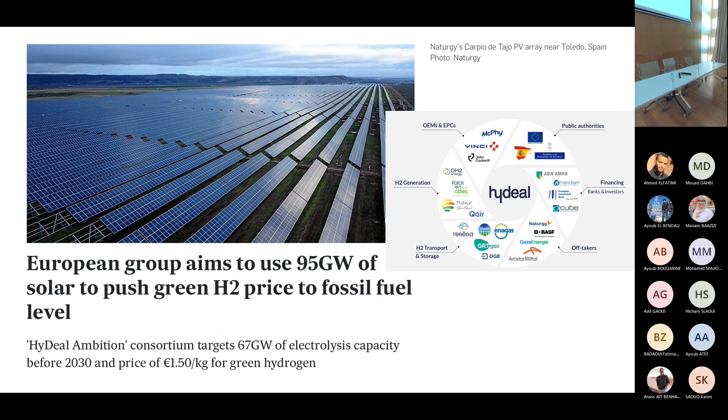If I take, for example, this HyDeal Ambition project from Spain, you can see we speak about 67 gigawatt of electrolysis capacity. It's enormous. I don't know how much is the production of Morocco, but I guess around 28 gigawatt. So it's twice the Moroccan electricity production going into hydrogen. If we look at the Swiss company H2 Energy, they signed an agreement with Plug Power of the US, also for a gigawatt scale electrolyzer, and this one is with offshore wind.

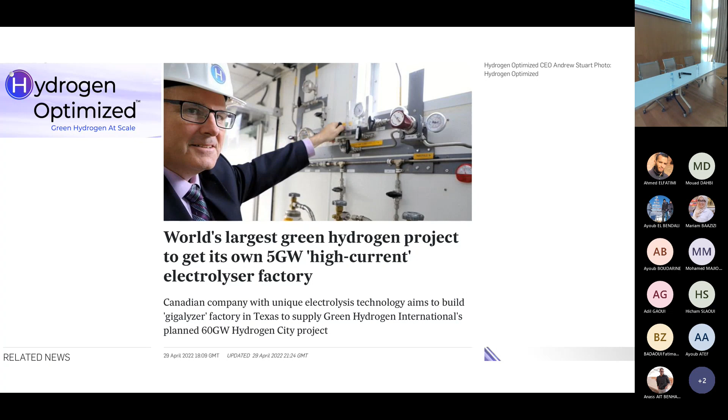If we go to Saudi Arabia, they speak about the world's first gigawatt scale hydrogen electrolyzer with ThyssenKrupp. ThyssenKrupp is known for doing chlorine electrolyzers, but we are speaking here about 500 billion. That's a lot of money. And of course, the Americans have to have the biggest, because the Americans always have the biggest. So they have the world's largest green hydrogen project with Canada for 5 gigawatt, and so on. And just 2 weeks ago, TotalEnergies of France signed an agreement with Adani of India for 5 billion investment to take 25% of Adani to do hydrogen production in India, and we are speaking of about 30 gigawatt.

So again, we are really at the big number scale, okay? So just to speak about Morocco, the only thing I could find was this announcement by Total that Total will invest in a mega project. So this one is not giga, but it's a mega project in Guelmim, which I believe is south of here.

Is that correct? Yes. So you know all about that? You know more than me about it?

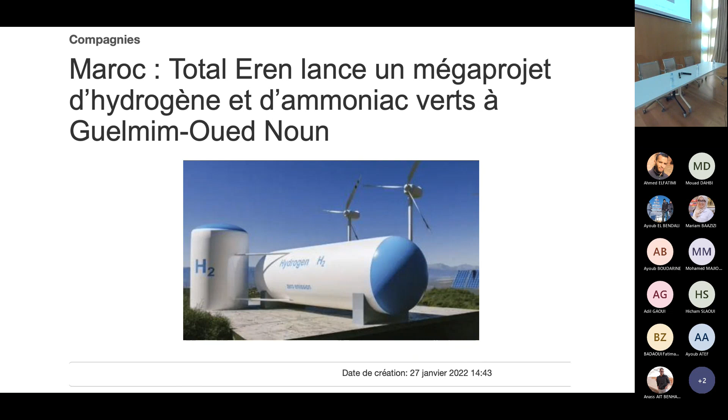Anyway, so why all those announcements? Is that just because the planet is really having a transition? Now, if we look back, the 19th century has been powered by coal and steam engines. So we all know that. The 20th century has been powered by oil and the combustion engine, and electricity was a vector of energy. And of course, in 2022, the question will be, what will be the energy of this century?

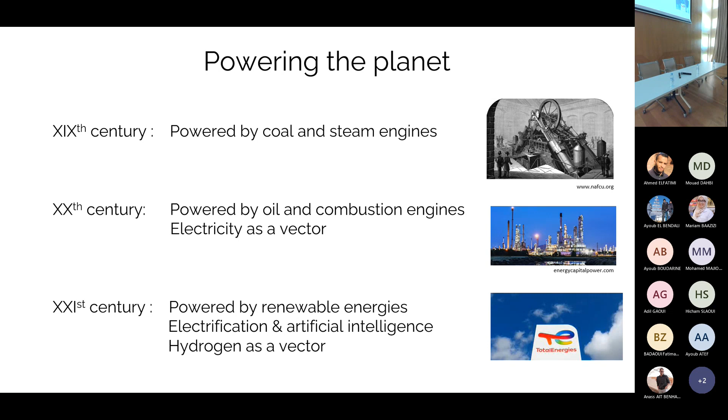And of course, if we believe in global warming and so on, we think it will be powered by renewable energies with massive electrification and massive use of artificial intelligence. And then the question is, can hydrogen be a vector of energy for this new economy? That's the key question. Now, if I take the EU roadmap, the EU is really pushing for a large-scale generation of renewable energy, and that means mainly for Northern Europe wind, for Southern Europe sun.

Then the idea, of course, is to distribute this energy across Europe for the different sectors and regions. Can we use storage as a buffer? That's a good question. And basically, what are the goals? Goal number one is to decarbonize transportation, and mainly, I guess, heavy goods transport. Decarbonize heating and power for buildings. You can now buy a water heater based on hydrogen.

And of course, decarbonize industry heat use. And in this one, green steel is really on the agenda. And I guess that Maghreb Steel in Morocco has ideas of doing... I say, I don't know that. Okay, so Maghreb Steel, I guess, has also ideas on how to decarbonize steel production.

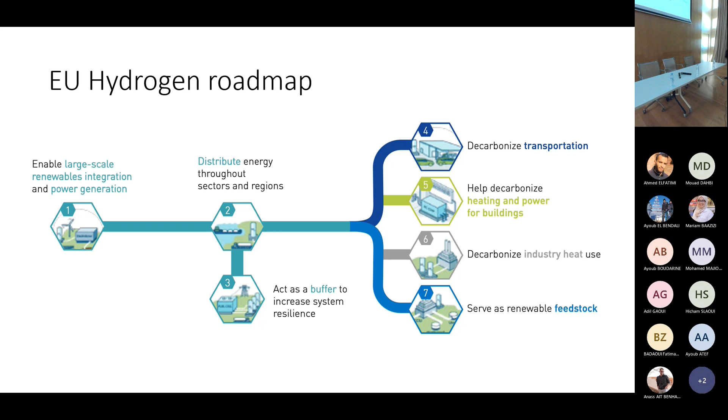And of course, at the end of the day, it will also be used as a feedstock. And that's what Power2X, the conference in Marrakesh today, is all about. Can hydrogen be used as a feedstock? So basically, this is the roadmap. And being a professor of chemistry, let's speak about chemistry and not too much about politics. And let's start with the colors of hydrogen.

So the hydrogen, as we know it today, 95% of the production is gray hydrogen. So at the beginning of the 20th century, hydrogen was produced mainly by gasification of coal, and that's what we used to call town gas. London, Paris were littered with gas lights, and this gas contained hydrogen, methane, a mixture of everything coming from coal, and that was the beginning of the 20th century.

Actually, in 1801, Philippe Le Bon in Paris, during Napoleon's time, had a house where he was producing hydrogen in his cellar to light the building. So if you go to Ile-Saint-Louis in Paris, go and visit Le Bon's house.

Anyway, when petrochemistry came, people started to stop gasification, and they started to go for steam reforming of methane, or even autothermal reforming of methane. The idea there was to react methane with water to make CO and hydrogen, so what's called syngas. And if we use the reversible water gas shift reaction, reacting carbon monoxide with water, we could produce hydrogen and CO2.

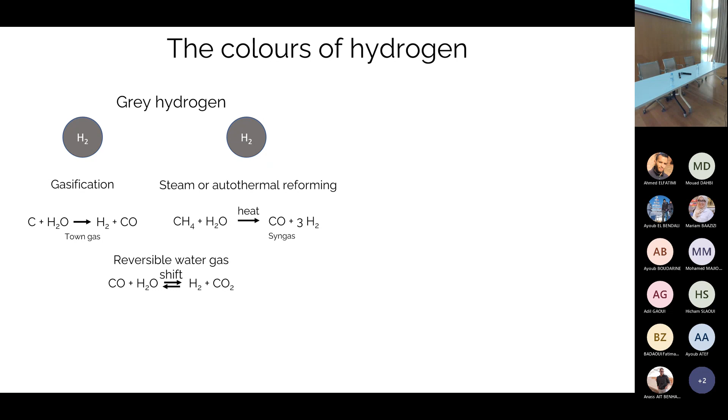And this is why this hydrogen is called grey hydrogen, because when we do steam reforming, we produce hydrogen and CO2. Now, if you can capture CO2, the hydrogen becomes blue, because it is assumed that you have no CO2 emission. So this is neutral production. What people call green hydrogen is done by electrolysis. That will be mainly the talk today, because I'm an electrochemist, where you split water into hydrogen and oxygen.

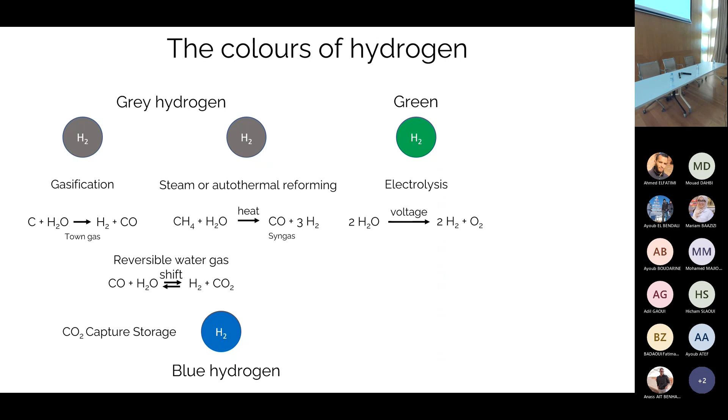And there is another type of hydrogen I want to speak about today, turquoise hydrogen made by pyrolysis. As a physical chemist, I think this topic has been understudied, and I believe that pyrolysis is a major route for the future, where basically you take CH4, you heat it up to pyrolyze it, and you end up with solid carbon that you can store or put in the ground, and hydrogen. And this one is really negative carbon capture, because out of the methane you get solid carbon that you can put in the field as biochar, or that you can simply store.

So in my laboratory, we've been playing with indirect water electrolysis. I will say a few words about redox batteries, that's for the students. And I will say a little bit about waste pyrolysis, because I am a great believer in circular economy, and I think the academic group that we are should really work hard to develop circular economy for this planet, especially for the young people. Anyway, so why is hydrogen a vector?

Because if we go for renewable electricity, of course, we cannot transport electricity over too long a distance. You can have a power line maybe up to 1,000 kilometers, but if you want to export, let's say, solar electricity to the UK, you would need a special DC power line, which will cost a fortune, and there are plans about it, but it's not yet made.

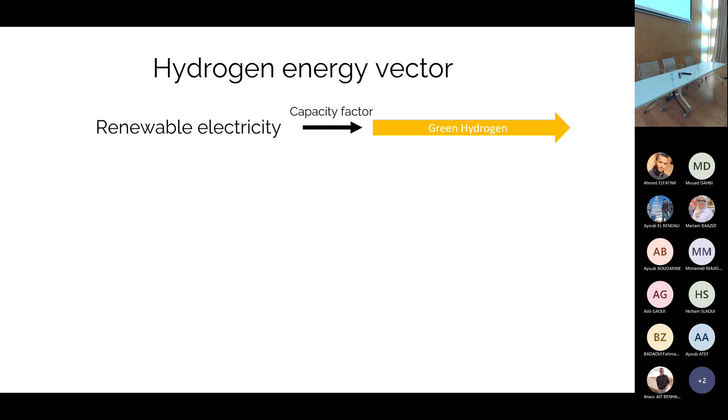So once you've done your green hydrogen, the question is, what do you do with it? Of course, you can transport it by pipeline, or you can liquefy it, or you can export it. But best, you can use it for your own use, for example, to make ammonia and fertilizer. Now, other people, when they speak about green hydrogen, that's the Swiss and the German approach, say, okay, at the moment we use methane, we are going to do steam reforming, then we do blue hydrogen. We can capture the CO2, let's say, in Germany, and in this way we have blue hydrogen.

But other people say, no, what we could do is to transport the CO2 back by boat to where the methane came from. And if you mix it with green hydrogen, you can do a methanation reaction, like the Sabatier reaction. And then you end up with green methane. Your methane suddenly becomes green because it's artificially made with hydrogen. You can transport it, and basically the green hydrogen can be used, let's say, in Europe. And now it's for you to believe if it's a good business or not.

At the moment, the methanation reaction has a yield which is not that great. So if you look, for example, from renewable electricity to green hydrogen, you lose 30 to 40%. Let's not forget that electrolysis has a yield of 60%. So if you go to what I would call the Swiss German route of methane, you lose 40% to do the green hydrogen, and then you lose another 30% to do the methanation. At the end of the day, it's a very expensive cycle. But some people are really investing money into that.

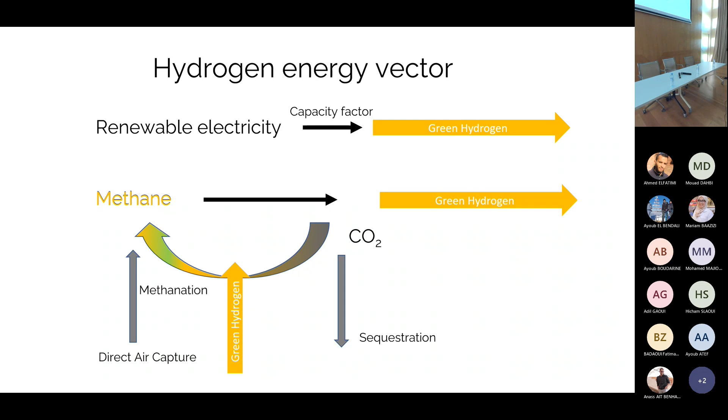I believe direct air capture has a lot of future. And since I'm an electrochemist, I would like to propose a mechanism. We all know air capture from amines, through caustic solution, alkaline solution, through different types of routes. But there is one electrochemical route that is used for air capture. Do you know an electrochemical route for CO2? Who knows one? No? So I have the pleasure to work for the company Verdox in the US, which is an MIT spin-off. And the concept here is easy.

You have one electrode with anthraquinone polymer. You have a membrane, just a separator, and another layer of polymer made with ferrocene. When you apply a voltage, you reduce the quinone to the radical anion, and for one electron, you will capture one molecule of CO2. On the other side, you oxidize your ferrocene to ferricinium. And then when you reverse the polarity, this CO2 battery gets discharged, and the CO2 is released. The advantage is that you release clean CO2 that you can use for a Fischer-Tropsch reaction if you want to, or a methanation reaction if you want to.

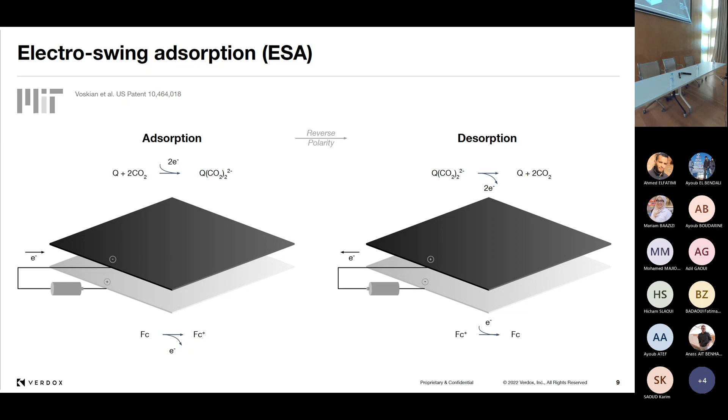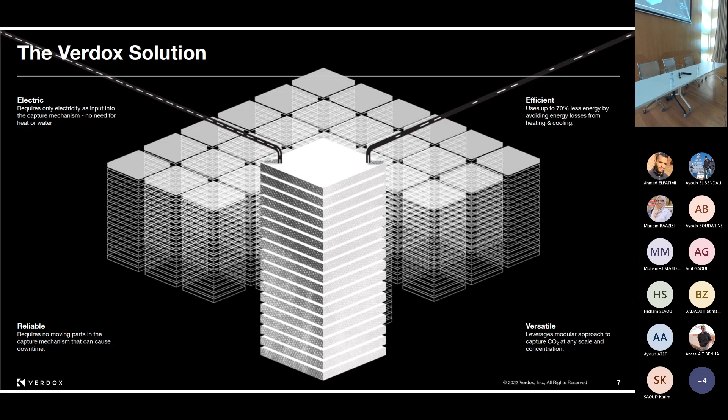And the idea of that is that because you need electricity, if you have efficient renewable energy like in Morocco, you can do direct capture also by electrochemistry, the same way that you would do green hydrogen by electrochemistry. And so I've seen prototypes of that in the US, and they have plans for kiloton, if not megaton, CO2 plants in the US. This company was financed by the Bill Gates Foundation. They got more than 80 million to develop their system, and they are quite efficient.

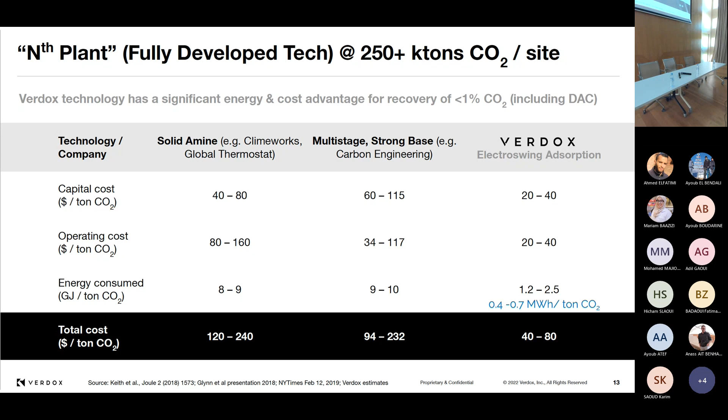And I guess that's big money, and it's quite easy to store CO2 in the ground in Morocco because you've got salt domes and you've got very nice geological structures to store CO2 in the ground. So Morocco could become a big country for CO2 storage afterwards. And so if you compare those with amine or with strong base, you see that electrochemistry for once is very competitive. And again, in Switzerland, we have a company called Climeworks, where they pump CO2 from the atmosphere to inject in Iceland under the volcanoes. But I believe an electrochemical system in Morocco would make a lot of sense.

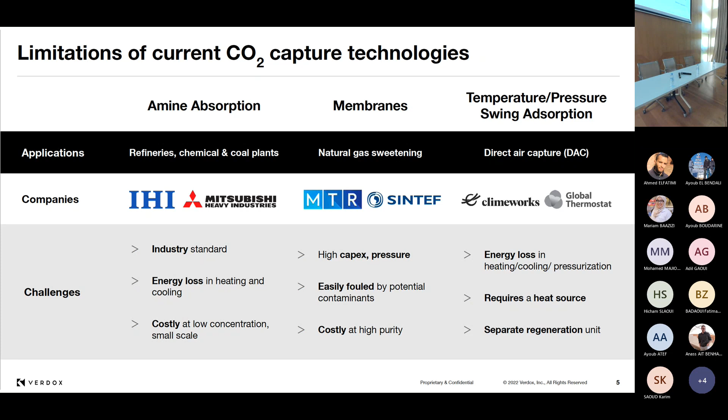Anyway, I close my CO2 capture bracket. I just wanted to make you aware that there are electrochemical ways to store CO2 in a very efficient and a very clean manner. Okay? It's not a big factory to do that. Okay, so let's go back to electrolysis.

A very old reaction. I don't want to say too much about the production or the reaction mechanism of hydrogen and oxygen. I know that Debajit has a big plan to study all the electrocatalysis aspects and the mechanistic aspects of hydrogen evolution. What I would just like to say in one slide: we should never forget it's a three-phase reaction. The metal brings the electrons, the solution brings the ions, and the bubble takes away the gas. And that's what I call ménage à trois. And like all ménage à trois, they are complicated, okay?

Because there is always one who is going to be slower than the other two, okay? So sometimes the bubble blocks, the ions cannot arrive. Sometimes the ions react, they don't arrive, and so on and so on. So basically, the complexity of gas-evolving reactions lies in the fact that you've got an electronic conductor, an ionic conductor, and a gas carrier.

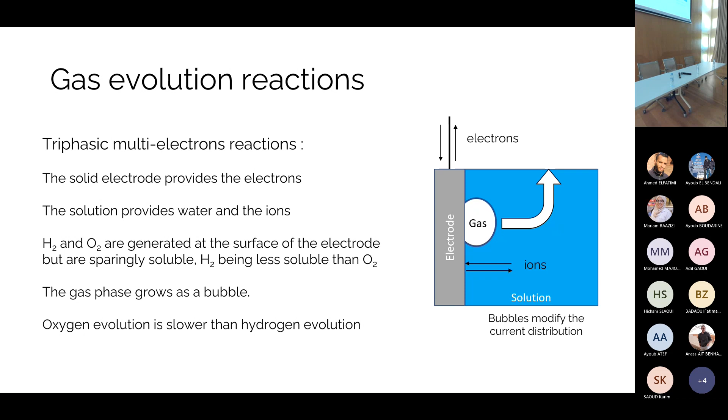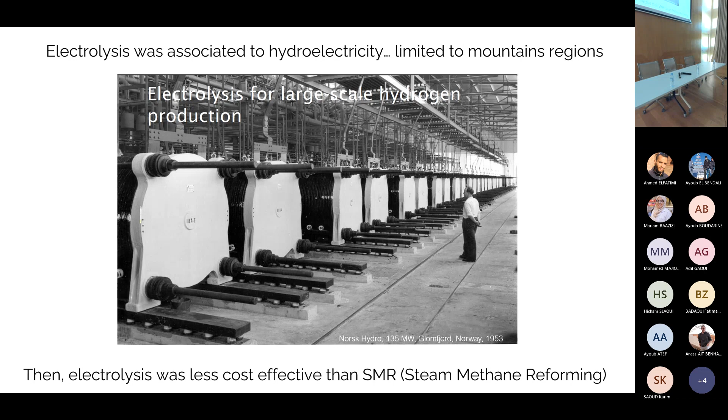Okay? But of course, afterwards, the oil era came, oil was cheap, and it was much cheaper to make hydrogen through natural gas and oil than through electricity. And therefore, electrolysis started to go down and SMR started to take over. Now, how does an alkaline electrolysis cell work?

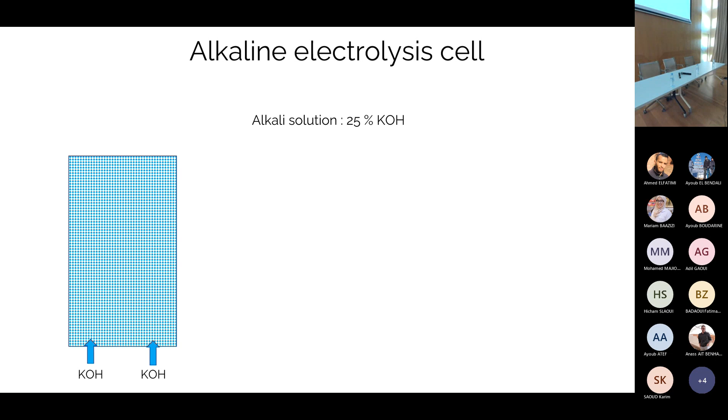Okay, at the beginning, what you need is an alkaline solution. For example, 25% KOH. Then you need to bring electrons, so you need a cathode. You need to take out the electrons, so you need an anode.

So at the cathode, of course, you are going to reduce your water to hydrogen. At the anode, you are going to oxidize the hydroxide to oxygen. That's the slow reaction. In the middle here, you need a diaphragm to avoid mixing. In the old days, people used asbestos, but of course nowadays it's Zirfon and other polymer type membranes.

You need to pass a current from the anode to the cathode. We should never forget that in an electrochemical cell, the electrons are carried by the wires and by the metal, and in solution the current is carried by ions. And because ions move by friction in a solution, there is a resistance, and that's where the system starts to get warm.

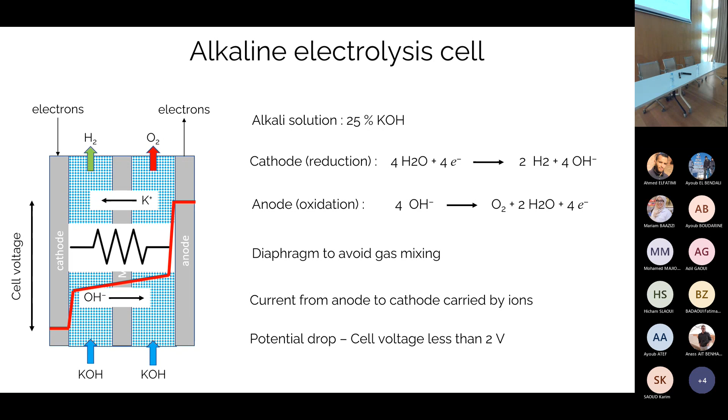And of course, in order to transfer electron to ion, you need an electrode reaction. So if we look at the distribution of potential in an alkaline electrolysis cell, we have a potential drop at the cathode where we do hydrogen. We have a potential drop in solution due to the migration of the ions. And then we have a larger potential drop at the anode where we do the oxygen. So this is textbook electrolysis for more than a century.

Okay. Now, to avoid the resistance in the membrane, people started to basically put some grid directly on the membrane in such a way to bypass the ohmic loss in solution, and that's what you call the zero gap cells.

They operate usually at 80 degrees. They have an energy loss of 40%. The cell voltage should be less than 2 volts to be useful. The current yield is very good, 98%, and the current density is not bad, 6 plus or minus 3 kiloamps, depending on the manufacturer, per meter square. So it's a big current that we are passing here.

We enter, of course, KOH in the solution. We end up with H2 and O2. Now, when you see a diagram like that, you would think that you've got liquid in between the electrodes. No, what you get is what I would call a chantilly cream type electrolyte, because it's bubbling so much that in fact you electrolyze foam. So if we were to put a camera in the electrolyzer, you would see a chantilly cake, basically, not a liquid.

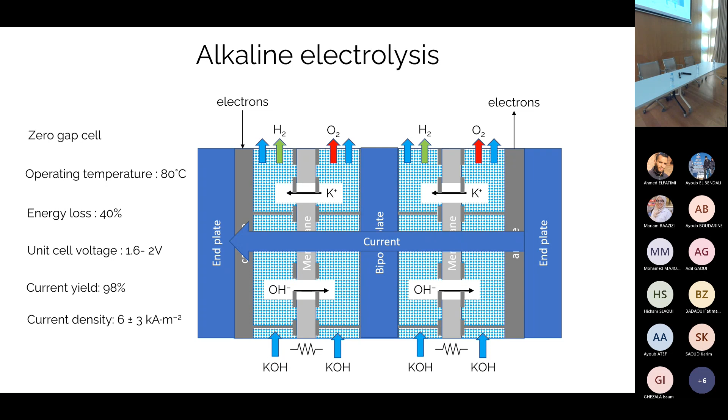But if you want to do more hydrogen, you put them in series, and this anode and the cathode in the middle end up at what's called a bipolar plate. Now, the current has to be constant through the system. So if one cell is not too performant, the other one has to wait for the slow one.

Okay, now you can stack them up to, let's say, 100 cells in series. So if you have 2 volts, 100 times 2 volts is 200 volts. That's quite good for power electronics. Up to 1 kilovolt, all the people who do power electronics can easily buy a transformer, rectifier, and so on, up to 1 kilovolt. After 1 kilovolt, power electronics start to be costly.

Okay, so that's why usually people stop at 100. Of course, when you've got 100 in series, out of 100, one could go wrong. If one goes wrong out of 100, it slows the full stack. So what people would do normally is shunt the faulty cell if there is really a problem.

But something I forgot to say about all those diagrams, we showed parallel plates. In the current distribution, if the plates are not ideally parallel, but one, let's say, is a bit tilted, all the current will go where the distance is the smallest, which means that you get a hot point. If you get a hot point, you might burn the membrane. So there is a lot of engineering in making a stack, and making the things parallel is one of them. That's why often people use titanium as a bipolar plate, because you need rigidity.

Now, all that is known for 100 years. So what we should teach students about electrolysis is the balance of plant, how to run such a system. It looks trivial by drawing. It's not trivial at all as soon as you operate it. Is the voltage fluctuating? Do you have high frequency noise on your voltage? Is your voltage signal clean? And so on and so on. Is the temperature changing too much?

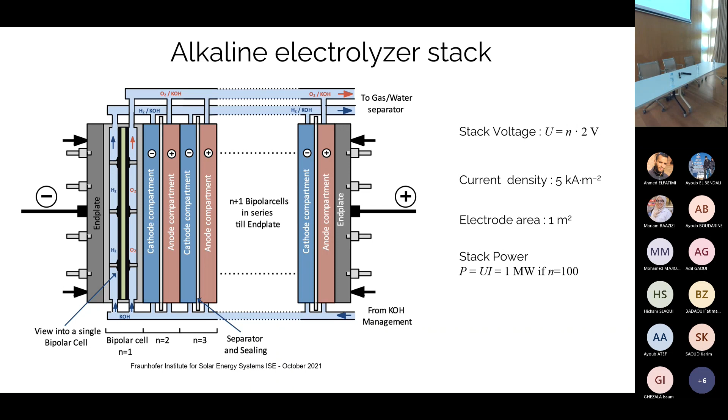Electrochemical engineering is not so much about developing a new electrolyzer, but more about how to operate them properly. If you don't operate them properly, they degrade, like any object we have. If we don't take care of our car, it degrades even faster. We all know that. Electrolyzer is the same, and those things cost so much money. They are built for 30 years. So if you want your electrolyzer to last 30 years, you better be nice to it and look after it carefully.

If we look at the balance of plant of an alkaline electrolyzer, the power electronics, transformer, rectifier, nowadays you buy from many companies. The electrolyzer, you've got also many suppliers. Oxygen is usually released to the atmosphere because people make so much oxygen they don't know what to do with it, so they just give it to the little birds.

Then the lye tank - you have to make sure your KOH is pure, that you don't have any CO2 entering into it, because if you do, you get carbonate. If you have carbonate, you block the pipes and so on. So you have to be careful. You have to scrub your hydrogen to make sure there's no oxygen leaking into it, because you don't want an explosion. So you need to scrub. You need then to compress, to deoxidize, remove the oxygen, dry it, and then store it.

As you can see, in normal operation, the 40 kilowatt hour per kilo becomes more like 50 and over kilowatt hour per kilo, because we have a balance of plant. So an alkaline electrolyzer is what I would call an electrolyzer for chemists, because it's really a chemical factory.

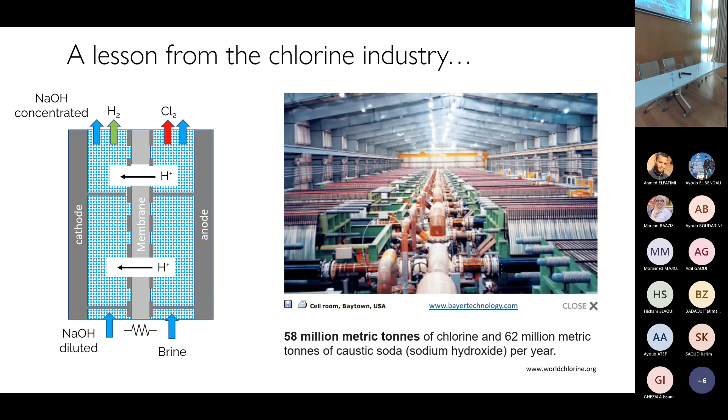Companies like thyssenkrupp in Germany know how to operate those 100 megawatt cells. As you can see, it's quite big. And if you have a pacemaker, if I were you, I would not work in such a factory, because the magnetic fields are so strong that you'd go.

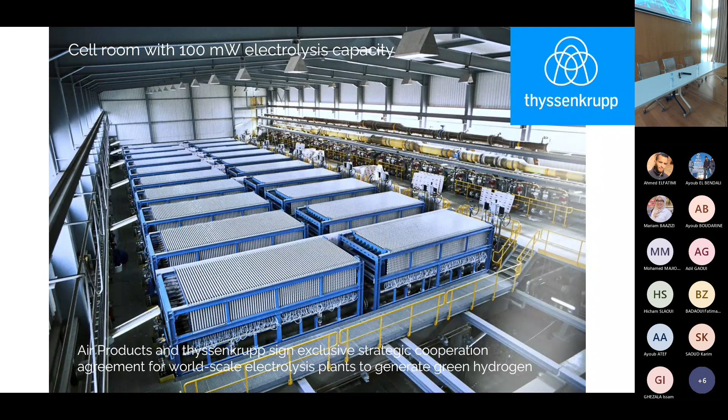Because when you do oxygen, you oxidize and you destroy your anode. Therefore, the anode is always the weak point of the electrolyzer.

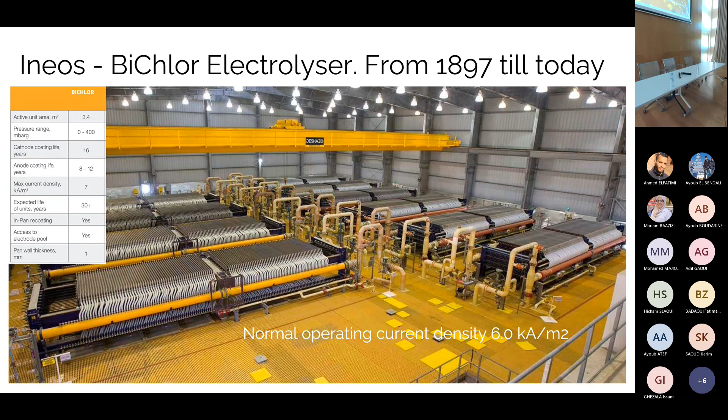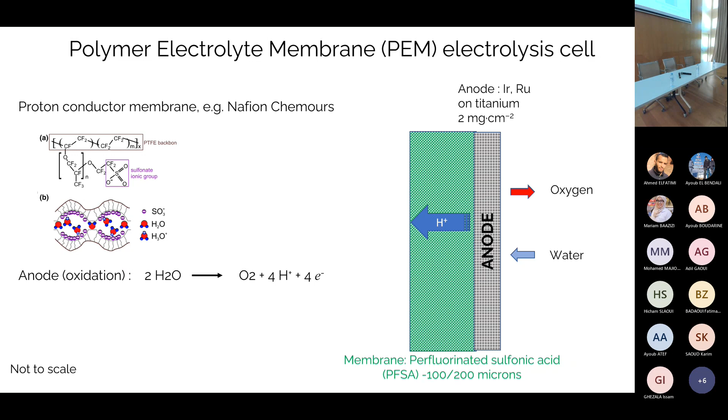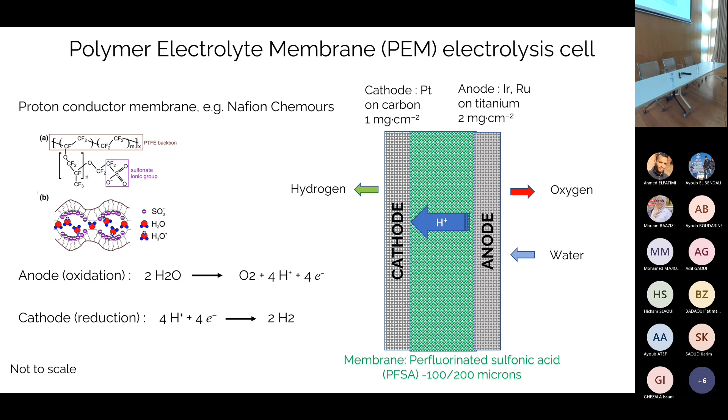Now, since the discovery of perfluorosulfonic acid, there is another type of electrolyzer on the market, which we call the Polymer Electrolyte or PEM electrolysis cell, based on a proton conductor. Again, on the right you put an anode - in this case simply a titanium felt with some catalytic particles on it. The cathode, again, will be a graphite felt with other particles, platinum on it. The proton will now be the only ion conducting the current. You feed the anode with water, remove the oxygen, and get the hydrogen on the left.

Again, we are going to put those afterwards in series. So platinum on carbon on the left, iridium or ruthenium on titanium on the right. Of course, nowadays the production of iridium is a problem, because most iridium comes from Russia and South Africa. So that could be a source of problem.

But anyway, if that was the only problem of the war in Ukraine, that would be fine. But anyway, we have bigger problems than that. Anyway, so what else to say here?

Of course, you need afterwards to structure your electrode to have a flow field where you bring the water and remove the gases. That's fine. The protons, as we said, go across the membrane. The gases go on each side.

And here you put a little layer of recombination just to reoxidize any hydrogen that would venture through the PEM membrane, so it doesn't cause any explosion.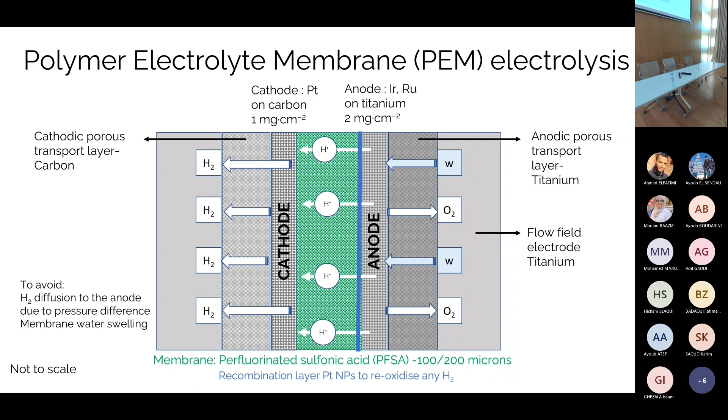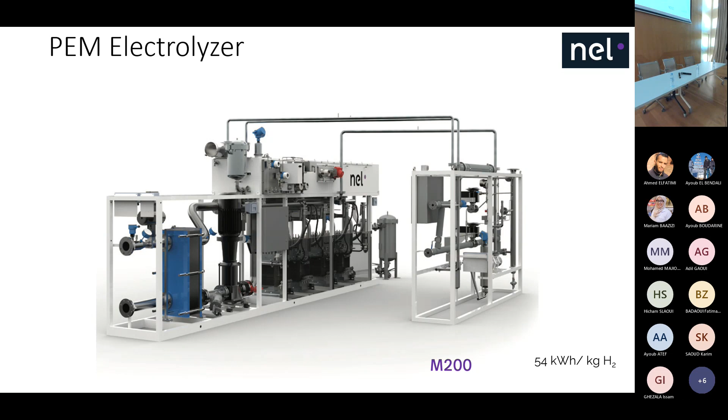Now, again, you stack them. And the beauty of PEM electrolysis is that basically you have zero balance of plant because it's a solid state device. So that's what I would call an electrolyzer for physicists. If alkaline electrolysis was electrolyzer for chemists, this one is electrolyzer for physicists, because there's basically no chemistry behind it. The only thing you need to do is separate the hydrogen and the water, dry it, and store it. So the balance of plant is much easier. Now if you look at a PEM electrolyzer, it's very compact. So to conclude, after one century of electrolysis, we have two good technologies to do electrolysis.

So the question is, are we ready to do Giga projects? All those Giga projects which are announced, can they be made? But to do a Giga electrolyzer, you need Giga production of electrolyzers. You don't have any at the moment. There are factories called Giga factories to build electrolyzers, and they're being built, but that will take 2 or 3 years before they arrive.

Now the key question is, if I take a country like Morocco, where would you put your green hydrogen production? Where would you put it? Next to the coast, of course, because the raw material is water. Now, deionized water is not very expensive, so deionizing water is cheap compared to the energy required for electrolysis. Of course, you have to worry about heat evacuation. Being by the coast is quite nice because you can use seawater for cooling your plant.

The advantage is that if you do it with your own renewable energy, wind or solar, you don't really need to care about a transmission line because you just produce your electricity locally. Therefore you know the price of electricity, because it's the price of your capex for the renewable energy and the capacity factor of your system. Whereas if you do that in Europe, it depends on the price of electricity from the grid, and at the moment this price is going up and down like crazy. It's impossible to make a business plan to produce hydrogen in Europe. Anyway, and of course you have to store it.

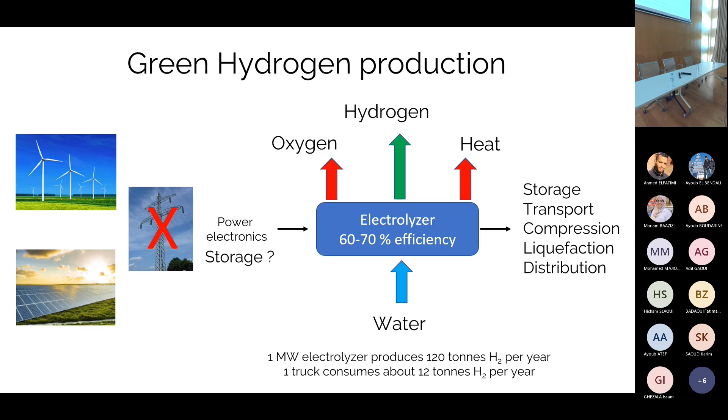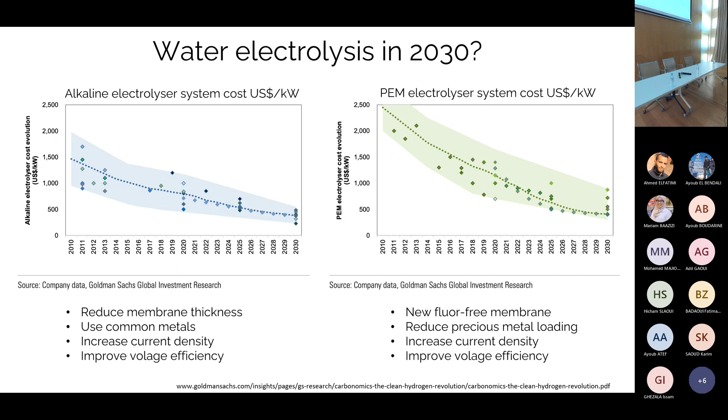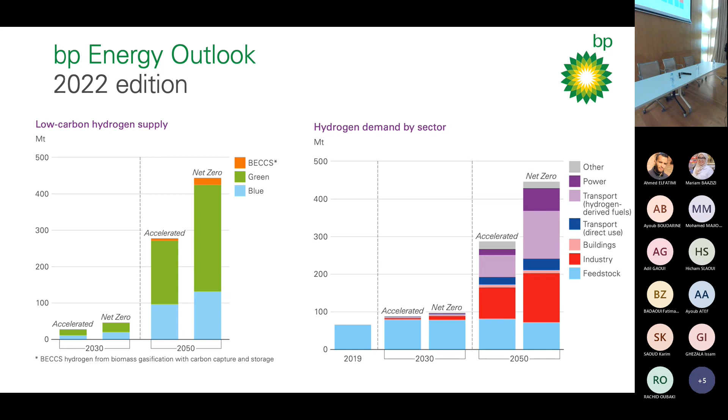So if I look at hydrogen with the eyes of a Swiss: in Switzerland, we have no electricity. If you take any newspaper at the moment about Switzerland, they say we will have a penury of electricity next winter. Buy candles, okay? Because we will be short of electricity. The Germans will be short of electricity. The French will be short of electricity. And since we buy our electricity from the French and the Germans, the chance that we will be short too is quite big. So if we have no electricity, even for cooking, we're not going to do hydrogen.

So in a country like Switzerland, where can we get our hydrogen from? Before the war, we thought that the Russians would sell us some blue hydrogen, because Gazprom had the idea of doing pyrolysis in Russia, mixing the hydrogen with the natural gas and exporting to Europe. I think this route we can now forget, at least for a while. Of course, in the North Sea, there are many people who have plans to do electrolysis directly using offshore wind energy. And of course, we have the route from the south.

Switzerland has no renewable energy as such. We have very little sun and no wind. But the north of Europe is a big wind farm, and the south of Europe is a big sun farm. When I say south of Europe, it's including North Africa. What is quite nice is that when it's windy in the north in winter, the sun is less in Africa, but in summertime it's the opposite. North Africa produces a lot, and therefore the two are totally out of phase, which is quite nice. So I guess Europe will import hydrogen, and countries like Morocco and Tunisia have a lot to offer. I guess you don't disagree with that, no?

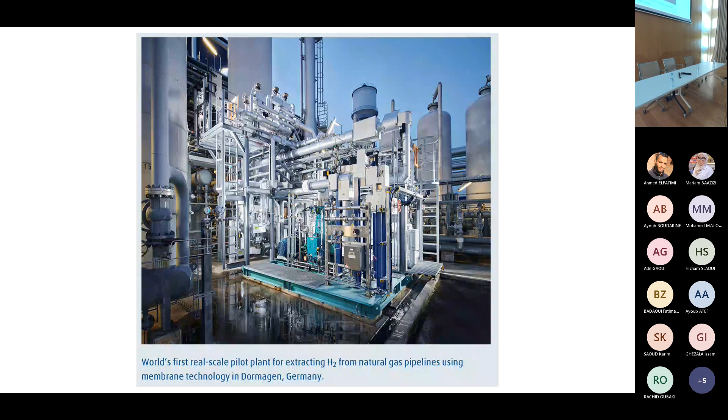Now, if I look at mixing hydrogen and methane in the same pipeline, it depends on the quality of the steel of the pipeline. In Switzerland, we can mix up to 6% hydrogen in methane. In some countries, where the pipes are a bit newer, up to 30%. And Linde, for example, has already made a demonstrator where you can separate hydrogen from methane when the mixture arrives. So if you produce hydrogen in Morocco, you can mix it with methane all the way through Gibraltar, and when it arrives in Switzerland, separate the methane from the hydrogen. So that is not a problem.

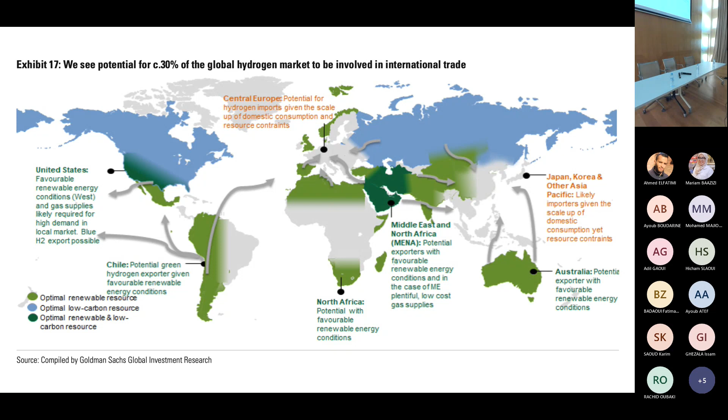Now, if I look at the EU plans for hydrogen refueling stations for trucks, they speak about one station every 150 kilometers. In urban regions, they want the system to deliver trucks at 350 bar and even cars at 700 bar. So there is at the moment a real political will in Europe to install a lot of service stations for hydrogen.

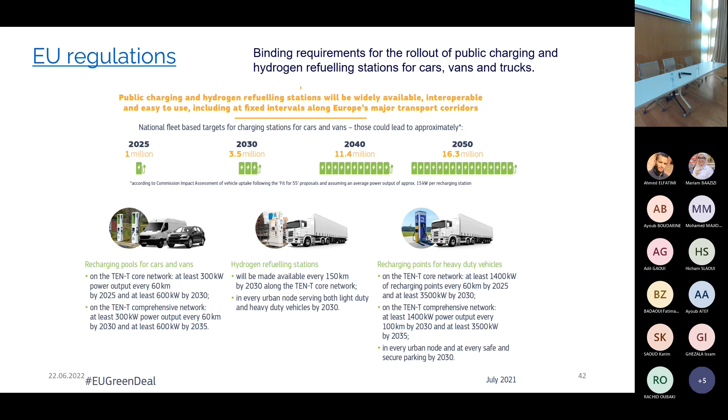So it's for the scientists to do the job. In Europe, there are two ways to do a hydrogen station. Either you do like the Swiss: they produce hydrogen, for example, at a dam in the central part, and transport the hydrogen by truck to the service station where it is stored and delivered. The French do the opposite route.

They transport electricity to the service station. They electrolyze directly at the service station. They store and they distribute. So that's the two business models. It depends if you have a good grid or a bad grid, and it depends if you have to pay a tax for the electricity or not.

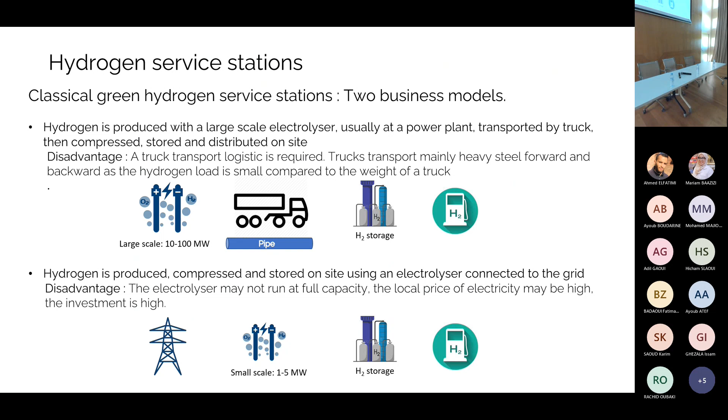Now I have had the pleasure for the last 5 years to be a scientific advisor of this company, GreenGT. And this year we were in Le Mans, and we set a record at 290 km per hour on the ligne droite des Hunaudières. And just to show this photo to say that hydrogen technology for cars is there. It's quite reliable.

We were expecting to do 300 km per hour, but the road was a bit wet and the air was humid. And in a fuel cell, you need oxygen from the air, but if there is humidity, you put in less oxygen. And as we had seen before, oxygen is the slow one. So if you don't put enough oxygen in the car, it doesn't go as fast as it should.

So next year, Le Mans 300 km, I pledge a beer to anybody in the room who's ready to take it, or beer or whatever you want, orange juice.

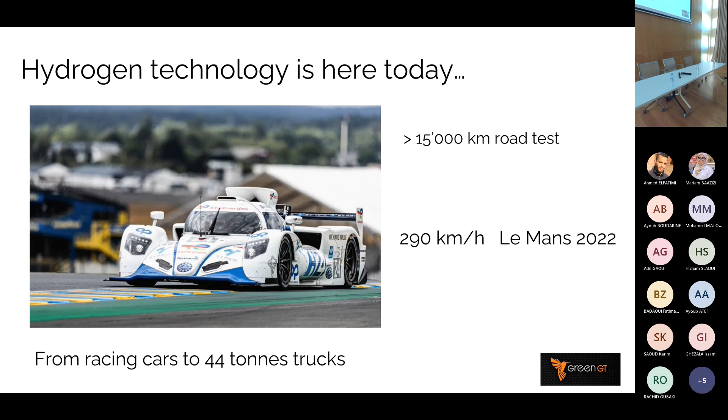Anyway, just to show here, it's written very small, but the car has 2 electric motors, so the wheels can spin at different speeds. But here we have 4 fuel cells, but with 1 balance of plant, and that's really the idea there. So 4 times 80, with 1 supply of hydrogen and 1 supply of oxygen for the 4 systems.

We like to say that our fuel cells are the Rolex of fuel cells because they are made by hand. They are really a nice piece of engineering. Those in the car have never been changed, and they work like on the first day. So again, you look well after your equipment as well.

And just maybe, the battery is 300 kilowatts with 3 kilowatt hours. So we charge and discharge the battery in less than 10 seconds because the battery is just there for braking and for accelerating. Because a racing driver is a bit binary, full throttle on or full brake on, and that's what the system is about.

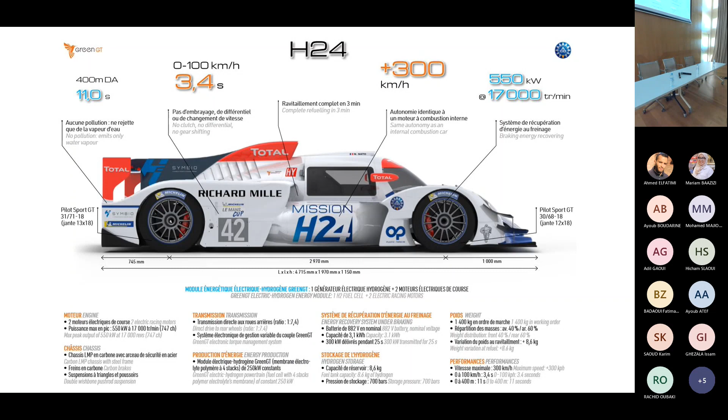Of course, we don't do that to make racing cars, we do that to make real trucks. So all the technology that we develop for the racing car, you should see the racing car as a fun, let's say, test bench to test your fuel cell, because there is a lot of vibration, a lot of constraint in a racing car, so it's a very good test bench.

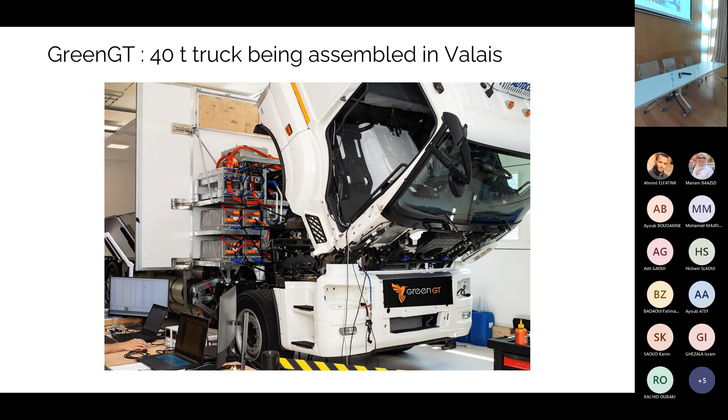And here, this truck is using two fuel cells, but with independent balance of plants for resilience. So it's twice 80 kilowatts, but totally independent. So one can work, the other one can be switched off, and so on. Here, the battery is much bigger because with a system like this one, especially when you start the truck uphill, you need a lot of power for starting. So you need a much bigger battery.

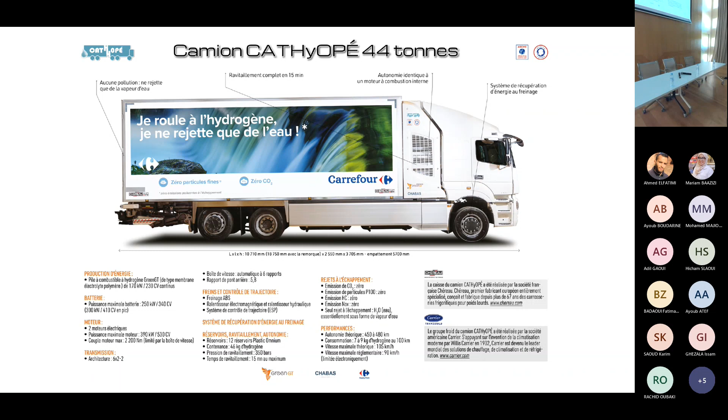If you don't mind, I would like to switch to a bit of physical chemistry because some people here in the room are working on vanadium. Who's working on vanadium? So just for you, okay? So the others can sleep, it's just for you.

I used to have a demonstrator in my lab where we had a redox flow battery, 200 kilowatt, 400 kilowatt hour, vanadium. There we had developed some power electronics to do what in 2014 was a fast charge, 80 kilowatt; now it's a normal charge.

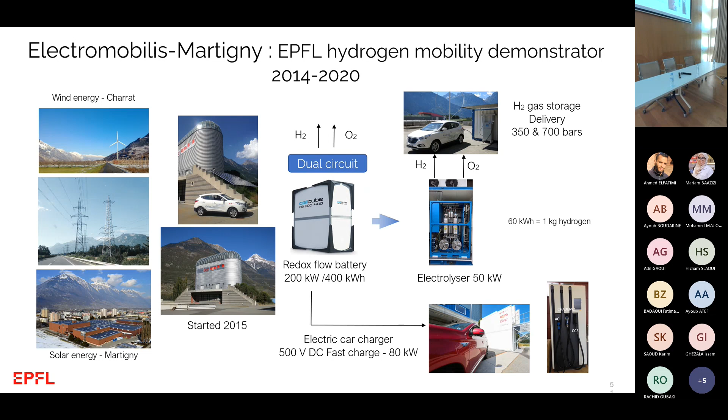And then we were driving an electrolyzer, alkaline electrolyzer, but we developed this technology of dual circuit here to do hydrogen directly from a redox flow battery. That's what I would like to present now to you.

And I remind you, what is the beauty of a redox flow battery? The power is the size of the electrodes, and the energy is the size of the tank. So you can have big power by having a lot of electrodes and small energy if you have small tanks, or small power if you have small electrodes and big tanks, you have big energy.

Whereas if you have, for example, the lithium iron phosphate battery, because you store within the thickness of the layer, power and energy are totally related. You can try to make the film a bit thicker to make it more energy, but there is a limit to that.

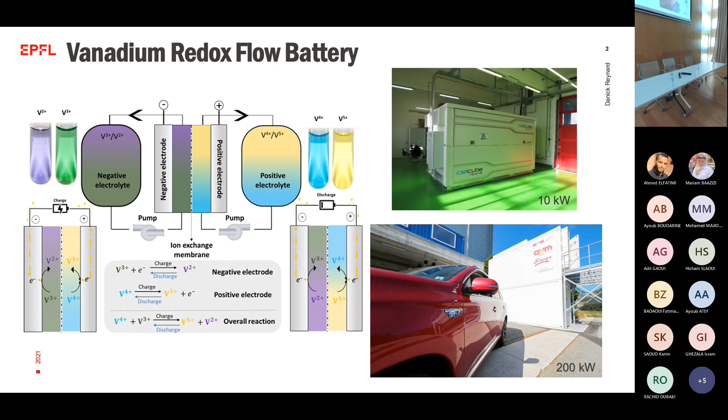Now, what we've done in my lab is to add to the positive side manganese salt. So I understand that in Morocco you have a lot of vanadium from OCP, you have a lot of manganese from the ground. So here you can do vanadium 2,3 on the left and manganese 2,3 on the right.

The idea is I will show you that if we pass the vanadium 2 solution on a catalyst, we will do hydrogen. If we pass the manganese solution on the right on a catalyst, we will do oxygen. And more important, we'll produce protons to equilibrate the pH of the full system. Okay. So are you ready for a little bit of electrochemistry?

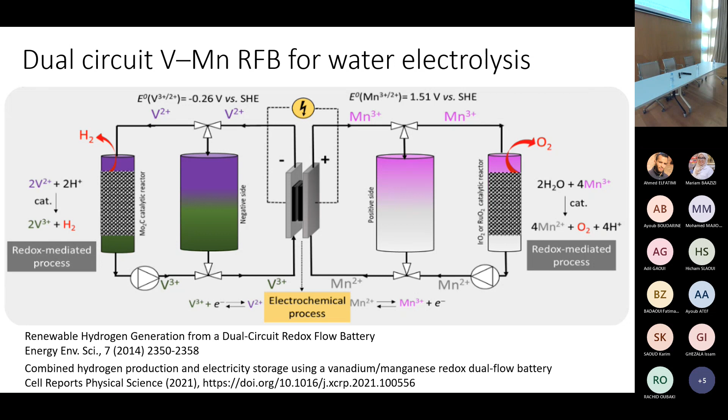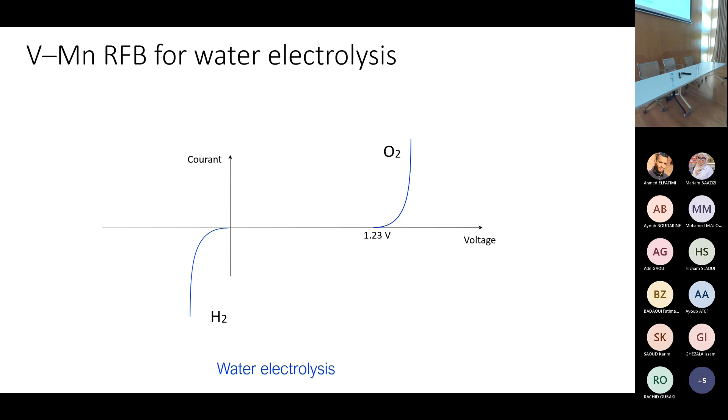So this is water electrolysis. On the left, if I go negative, I do hydrogen. On the right, if I go positive, I do oxygen. Thermodynamic potential 1.23 volt, but because of the kinetics, it's spread.

Now, if I use vanadium 2, we see that vanadium 2 is more negative than the proton. So vanadium 2 should be able to reduce the proton. It's like when you put a piece of zinc in an acid, you form hydrogen and zinc 2+. Here is the same thing. The vanadium 2+ becomes 3+, and you do hydrogen.

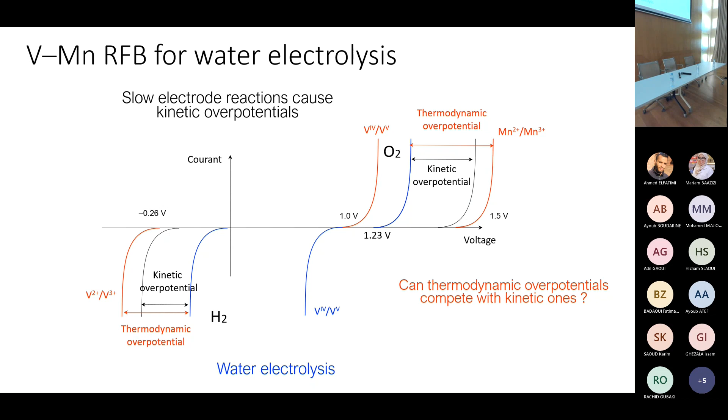On the right, unfortunately, vanadium 4,5 is not a strong enough oxidant to oxidize water. That's why we use manganese. Manganese has a redox potential of 1.5 volt, and then it can oxidize water. Now, usually, manganese in solution dismutates to form MnO2, and it's a nightmare. But for some reason, which I cannot really explain, when we mix vanadium salt and the manganese salt, we don't have MnO2 precipitation.

Now, that will be 3 slides of pure physical chemistry. There is an exam at the end. Okay.

We're all familiar with the Fermi level of the electron in the metal. So if I extract the electron from the Fermi level, I've got the work function. Do you agree with that? And the Fermi statistics is from the bottom, so we stack all the electrons in the metal until the Fermi level. For the Fermi level in solution, it's a bit different because it's a Fermi statistic with 2 states, oxidized or reduced. Only 2 states. And when you have a 2-state statistics, the Fermi level is in the middle. As simple as that.

And how do I define the Fermi level of these 2-state statistics versus vacuum? I just say it's the work to bring an electron from vacuum to this redox couple, i.e. to its Fermi level, and that will define, so to speak, my redox potential. So for an electrochemist, we speak about redox potential. If I want to speak to a physicist who thinks in terms of energy level, I will call my redox potential the Fermi level of the electron. It's a real Fermi level. It's a 2-state statistics linked to vacuum.

So in electrocatalysis, what you have here is a Fermi level in solution and a Fermi level in the metal. But if the reaction at the surface is slow, you put a particle, and the Fermi level on the particle equilibrates with the Fermi level of the metal, because in metal-metal contact the Fermi levels equilibrate. That is what we call electrocatalysis. You agree with that? Okay.

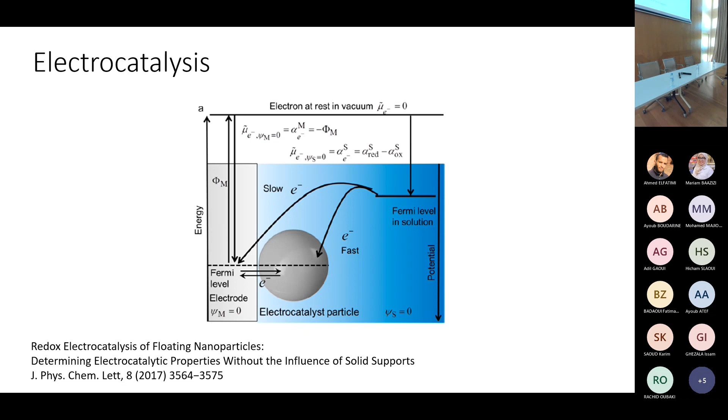Now, what I call redox electrocatalysis is different. I've got two redox couples, for example, they exchange different numbers of electrons. They don't speak to each other, like vanadium(II) and protons don't speak to each other. But if I put, for example, a piece of gold or whatever metal in between, platinum, then the electron can go from vanadium(II) to the platinum or the gold, and then from the gold to the proton. And that is a redox reaction. Two redox couples want to react, but by putting the metal in between, we allow the reaction to take place. Okay.

Now, of course, if one reaction is fast and the other is slow, for example, if the one at the bottom going right is fast, then the Fermi level on the gold will equilibrate with the Fermi level of the redox on the right. If it's the first reaction which is fast, the Fermi level equilibrates with the one on the left. Okay, so that's the principle of electrocatalysis.

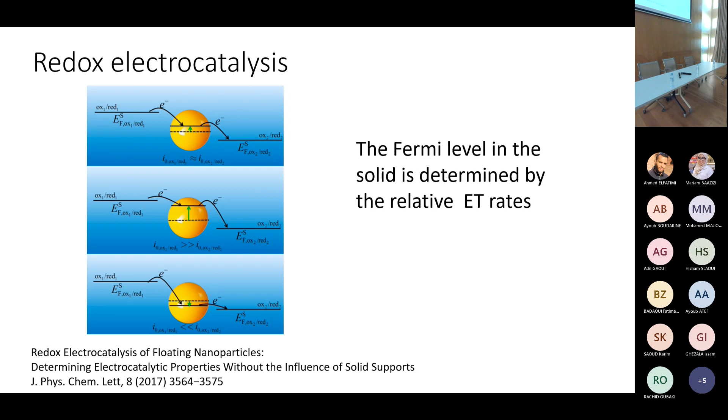Now you will tell me, how do I change the Fermi level of a particle in solution? Well, that's very easy from electrostatics. It's just the charge. If you take, for example, a piece of gold in there, it has a Fermi level given by gold, 5.3 volt work function. Now, if I charge my gold positive, it will be more difficult to extract the electron. If I charge the gold negative, it will be easier to extract an electron.

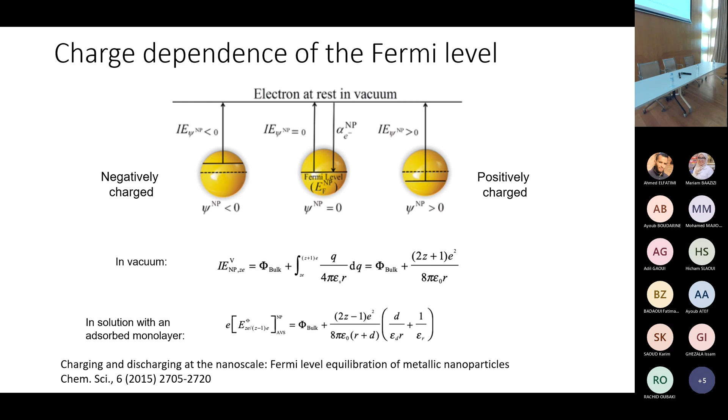Okay, so for the nanoparticles, the Fermi level, so to speak, or the voltage of the particle if you want to speak as an electrochemist, will change simply by changing its charge, because there are no wires. Electrons cannot appear from a wire. So the redox couple will give the electrons, and the charge will adjust in such a way that I can do redox catalysis, electrocatalysis.

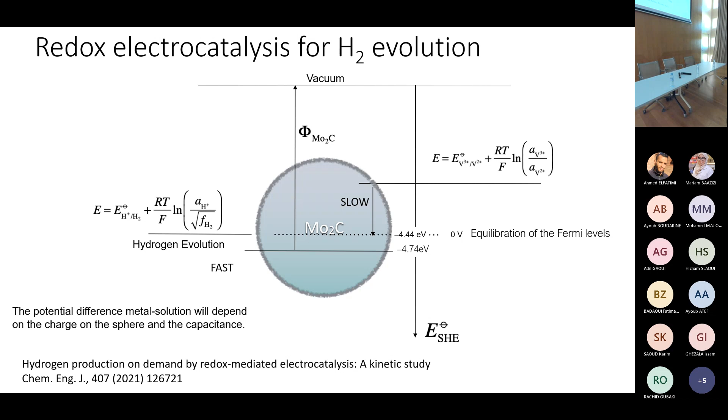And that's what we do here for the vanadium. I'm going to use molybdenum carbide. Here on the top is the redox potential of V2/V3. On the left, the one of the electron. And here, the V2/V3 is a slow reaction because it's heavily hydrated on molybdenum carbide. But hydrogen is much faster, which means that I do hydrogen at the speed of arrival to the particles.

Okay. So if I want to cheat the system a little bit, I will put a few particles of Mo2C where I do the hydrogen evolution, but a large area for the V2/V3 to occur. For example, I can take a long carbon nanotube and put, let's say, two nanoparticles of catalyst. The vanadium has plenty of surface area to react, to be oxidized, and then the electron goes onto the particles and evolves hydrogen. The same on the right for manganese 3 and 2.

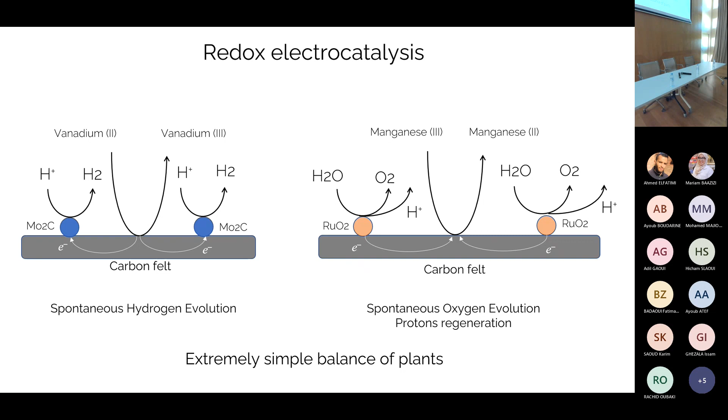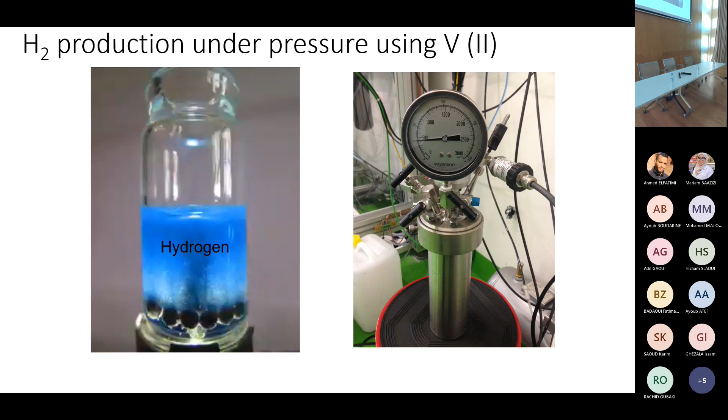You like it? Just for you, I said.

So what we have been proposing to set up as a company is to say, okay, Switzerland has no energy. The only thing we will have is solar panels on the roof. And because the sun is only at lunchtime, we have to store energy. So we will need plenty of distributed energy storage capacity. And redox batteries are good for distributed energy storage. It's the size of a container.

So basically, the idea is to have an intelligent vanadium manganese battery that feeds from the grid or your solar panels. When you want to do fast DC charging of your car or your truck, you charge from the grid, but you can use the battery as a boost, because when a truck arrives with a few hundred kilowatts, it's a bit of strain on the grid, so the battery can handle the spike. And if you want to fill a car with hydrogen, you just discharge your system chemically through the catalytic reactor and you make hydrogen.

So that's what we try to set up as a business model for what we call an energy station, because the idea is, what if we have an electricity cut? In Europe now we are thinking in business terms about what happens when the electricity is cut. 21st century Switzerland. People are worried about their data centers, their fridges. If you are a Carrefour market and your fridge or data center goes down, there is no more Carrefour market. So those guys will need energy stations for storing electricity, maybe electricity or hydrogen for their trucks, and things like that.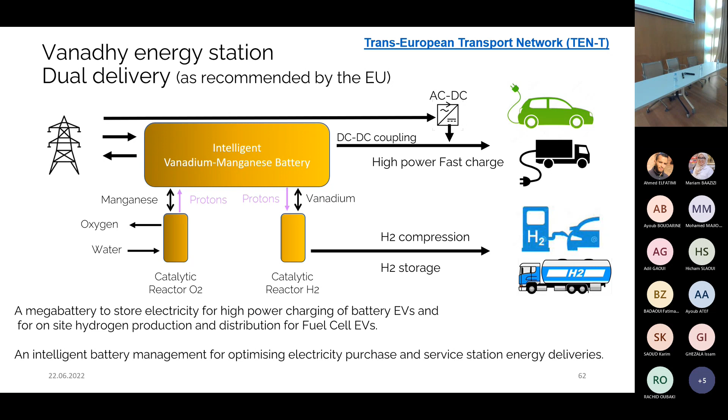And the xenon lamp is the flash that photographers had at the beginning of the 20th century. It's just a glass tube filled with xenon, and they discharge the capacitor, okay? 100 years old technology. As you can see here, the silver absorbs the light energy enough to melt the silver. So it means that the silver will go to 800 degrees, non-equilibrium, for a few microseconds or milliseconds. That's well known in the printing industry, but we are speaking about 20 kilowatts per centimeter square. That's a lot of energy.

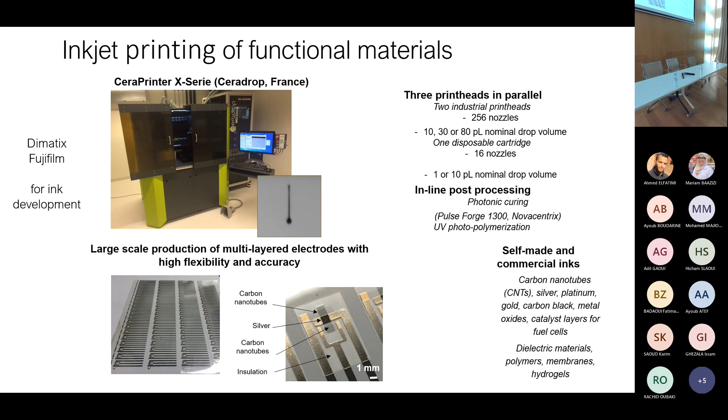So briefly, in my lab, we used to do sensors. So there it's quite easy. We print the carbon, we flash it. We print the silver, we flash, we have metallic silver. We print the silver chloride, we dry it. And so print, cure, we can do a sensor which is multi-layer in few steps rather than taking the thing out, going to the oven, put it back on the printer and so on. Anyway, and we say, okay, maybe we can do some chemistry with that.

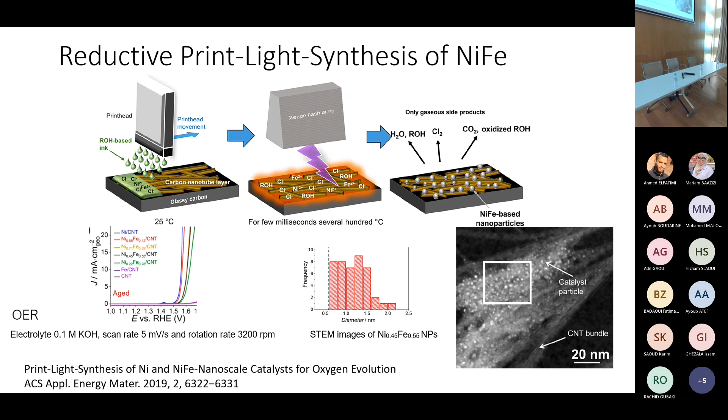If I take sodium, nickel chloride or iron chloride, and I print it, I will reduce the salt to nickel iron particles, and I will oxidize the solvent, let's say ethanol, for example. And for example, to do the molybdenum carbide I had shown you before, here we use molybdenum oxide, we flash on the graphene, and we form directly molybdenum carbide. So we can do carbide directly on carbon.

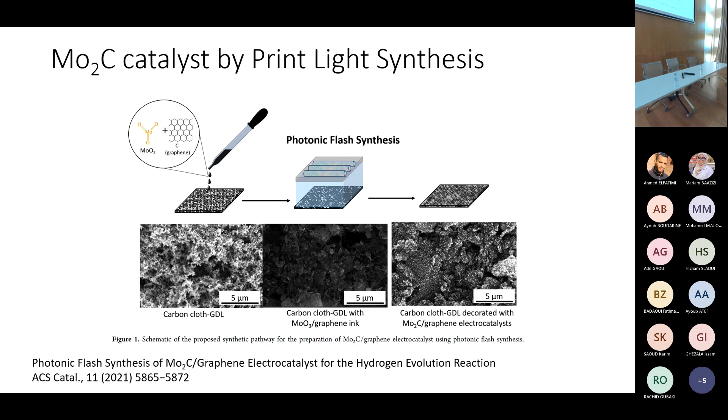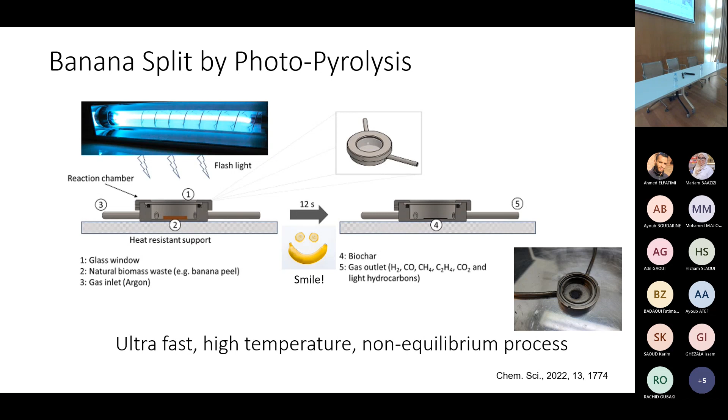So we decided to do something for what we call banana split by photo-pyrolysis. The idea was to have a reactor which is a bit like my watch here. So steel with glass on top, okay? Because that had to be on the printer at the beginning. So we put inside some dry banana skin, we flash a few milliseconds, and what we have is hydrogen and biochar, okay? Bit of CO. So basically, we could split biomass in few microseconds or milliseconds and obtain this biochar there. And that's what we call photopyrolysis.

What is pyrolysis? Pyrolysis is how to break molecules with kinetic energy. So fast kinetic energy because of temperature, the atom goes and we start a chain radical reaction. In photolysis, a photon is absorbed by the chemical bond and the electron is ejected. And we believe that photopyrolysis is a mixture of the two processes. Because as chemists, we know very little how to break a molecule.

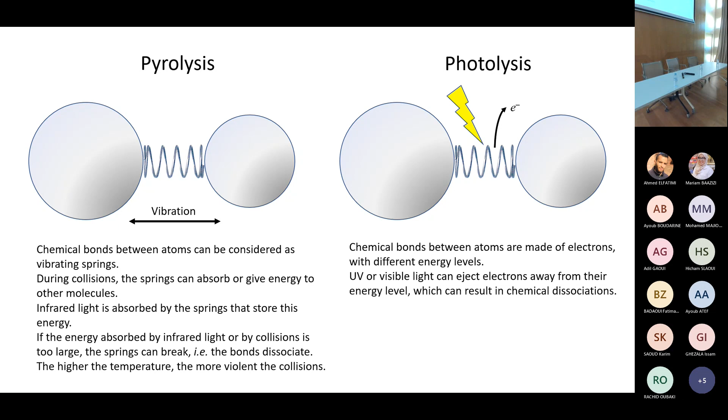So as a physical chemist, I know that if I've got my diatomic molecule, I put some photons in it, I will have vibrational energy until it breaks. But as soon as I've got 3, 4, 5 atoms, I don't know the distribution of energy in the different vibrational states, and therefore we know very little how to break molecules. It's crazy, huh? We know how to burn molecules, we know how to make molecules, we don't know how to destroy molecules. If you look at the literature, even the transition state theory does not apply to molecular dissociation for polyatomic molecules. So if some people want the Nobel Prize in the room, there is a real problem of chemistry, how to break a molecule.

Anyway, so if we look at the hydrogen content, you guys are doing cellulose. In cellulose, I've got 6% in mass of hydrogen. In water, I've got only 11% in mass. So I've got twice as much hydrogen in water than in cellulose. Not too bad. You have more hydrogen in a liter of petrol 95 than in a liter of water. So the question is, are we obliged to do hydrogen only from water? And the point I tried to say is that no, I think if we look at the biomass, so even the best would be methane. Methane cracking is the holy grail. If you break methane into carbon zero and hydrogen, you are the king of the planet, because you solve all the world problems.

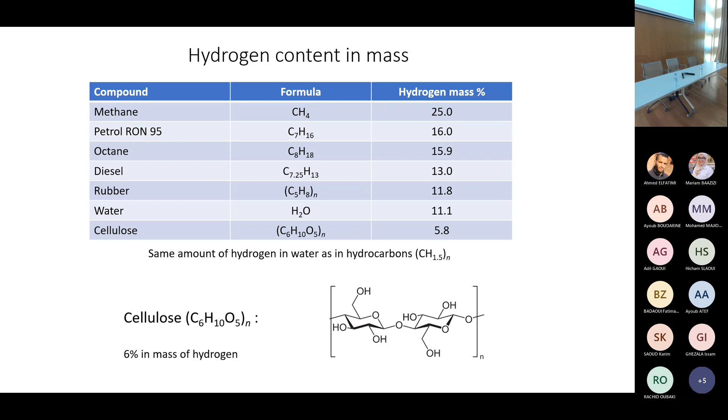And that people do that by plasma. Anyway, so what we used to do for the banana is just this recipe.

But just to say that if all the banana skin of the world were photopyrolyzed, that would be equivalent to 300 megawatts of electricity. Just to say there is a lot of hydrogen there.

Now, if I don't want to be honest, I would say, look at that, I've got a lot of hydrogen, a bit of CO, a bit of methane when I do a chromatogram. Of course, it's a TCD detector, so the small mass has a big peak. In fact, I've got as much CO as hydrogen, but the detector is much more sensitive for hydrogen. So because we are chemists, I'm not going to lie to you.

If we were banking people or business people, I would tell you, hey, look at all the hydrogen we can do. Anyway, let me say this.

The interesting thing here is that we can do very porous carbon, which is conducting, and the system does not depend on the substrate, glassy carbon, platinum, or glass, or whatever. It is really the banana that is exploding.

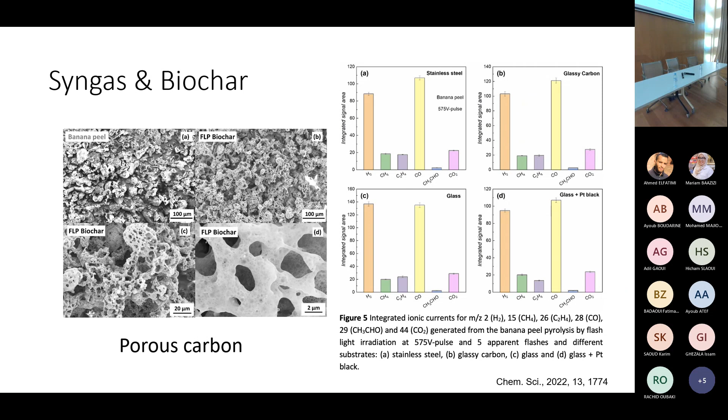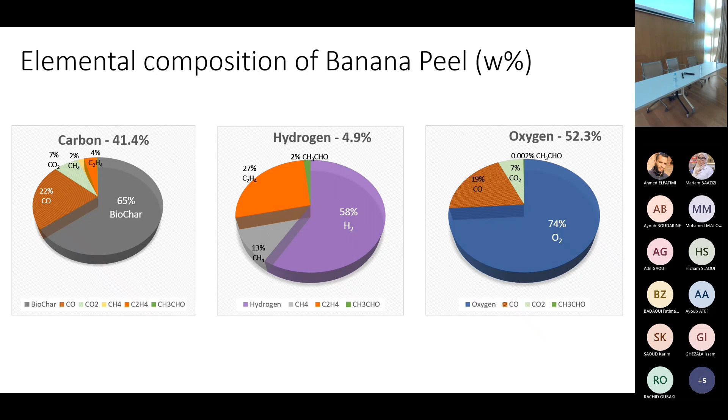So we've been playing with that with the dry part of the biomass, for example, terreau in French. So when the bacteria have done their job of digesting the biomass, you get a solid part that can be photopyrolyzed.

Coffee grounds for Nestle works very well. Tires is very nice, it's just carbon and hydrogen. So if you photopyrolyze rubber, you only get pure hydrogen. Okay, you don't get pure carbon because the tire is full of rubbish, zinc oxide, silicate. There is a lot of inorganic fillers in the carbon.

And we even did it on the tar from the road, because in Switzerland, some of the tar is full of toxic compounds, and it is sent to Holland, where it's pyrolyzed in an oven, and then the dry part is put in an oven.

Anyway, so that is to say, pyrolysis is one of the oldest chemical techniques in the world. The Egyptians used to do tar. So you just take wood, put clay around it, put the fire at the beginning inside, there is no oxygen, and you get charcoal. People have been doing that for a long, long time.

And the Egyptians, they were recovering the tar to make the boat waterproof. The charcoal, I don't know what they did with it, cooking, I guess.

And then people realized that when you make holes in it, in the 18th century, when Priestley, Lavoisier and this world started to realize that gas is a molecule, they realized that if they make a hole on the top, sometimes it caught fire, there was hydrogen. If they put a cold metal plate, they would form water. And that's why they call it this gas hydrogen, the gas that forms water.

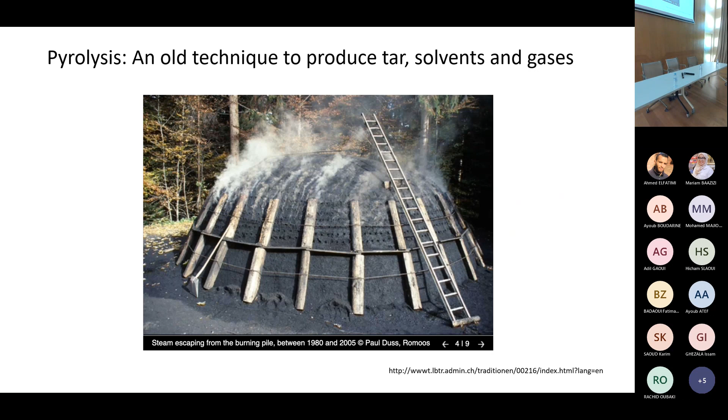So, very old process, pyrolysis. And that is for you, Guinel.

These guys here, Levidian, they take methane and they say that they use a plasma to ionize the methane, and they even say that they direct microwave at it. So I understand it's a microwave plasma system doing only hydrogen and graphene. And for me, this is the holy grail of what we need.

We start from methane. We have negative carbon capture with graphene. Maybe one day we will do carbon nanotubes, God knows what. But if you look at Graforce in Germany, they do the same thing here.

They call it plasmalysis. And the very interesting part of plasmalysis compared to electrolysis is that you need a third of the energy. So if you have renewable electricity and you do plasmalysis, you need only a third of the electricity you need to do electrolysis.

You guys are good at this. Very interesting, huh? Yeah? Oh, very important. I think it's very important.

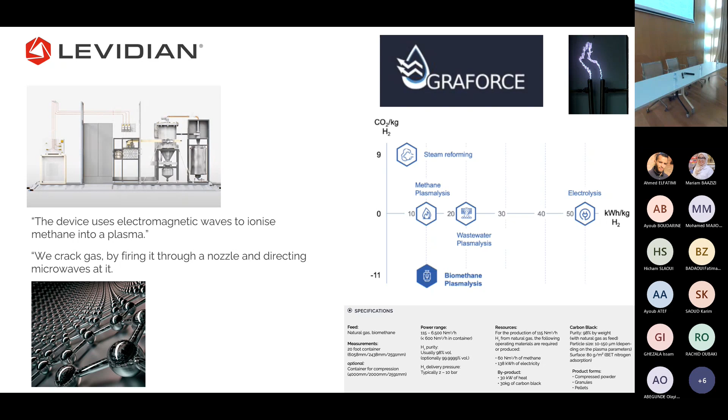If I was young, I would move in this direction. Because if you can do carbon, then afterwards, as chemists, we know what to do chemical reaction. We know how to functionalize carbon.

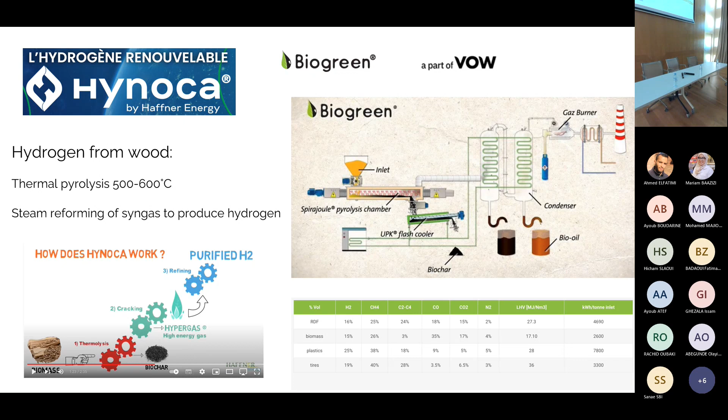And I will stop here. Thank you very much for your attention.